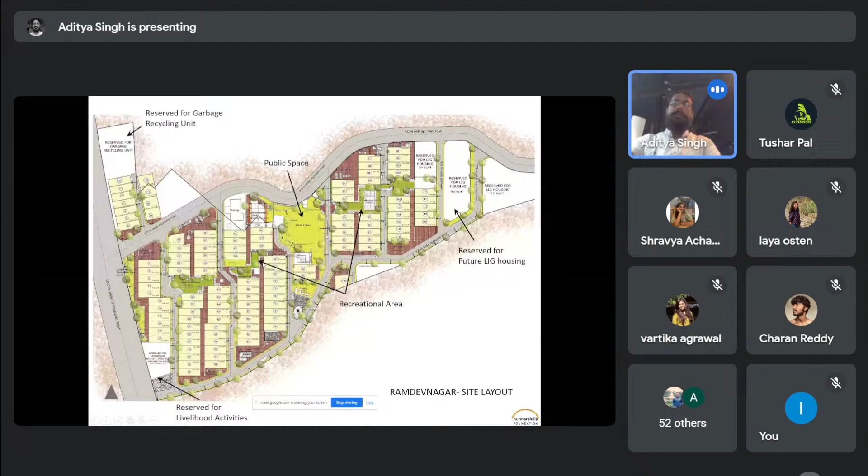So this is basically the strength of a participatory process.

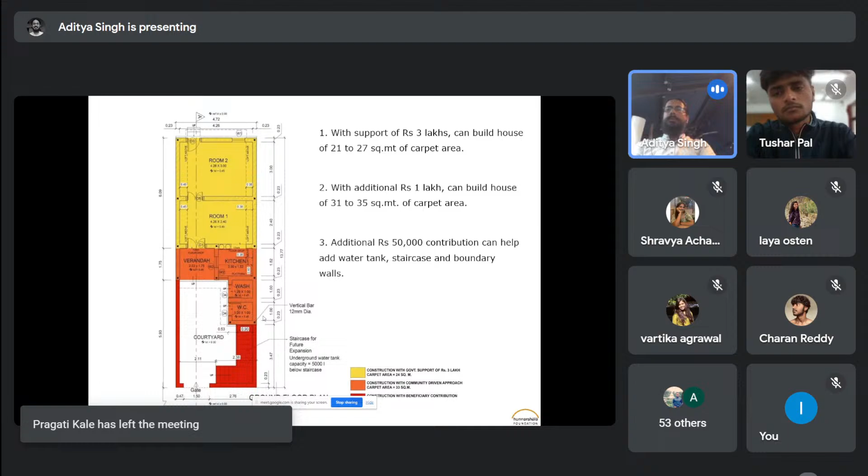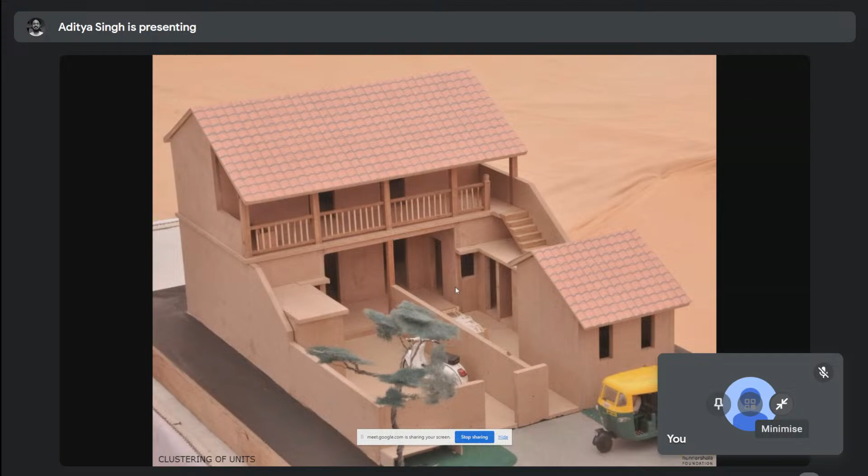They said, why do we build the same model? I need only one room and you need two rooms, so you build one room and I won't. I can invest that money in a staircase instead. So maybe they built a staircase and saved more money. Even the boundary wall at the center can be removed to create a bigger shared courtyard.

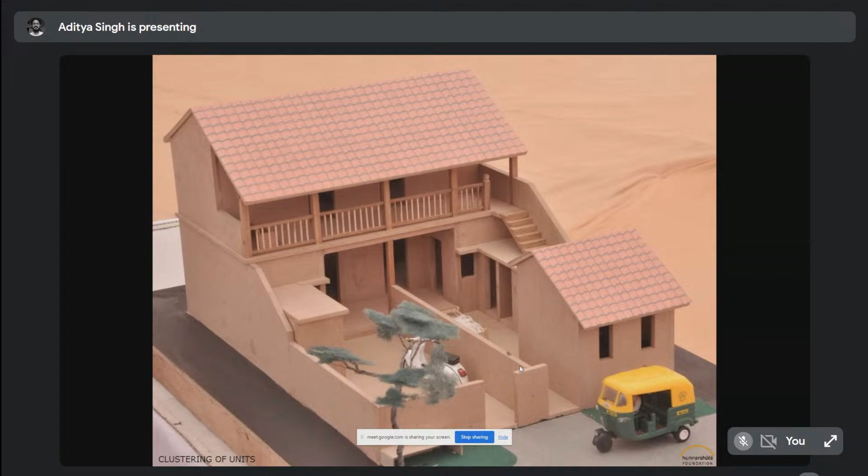These are the options given to people under what we call negotiables and non-negotiables. Non-negotiables were items proposed for structural safety of the house, since it's an earthquake-prone area, so certain design and planning guidelines had to be followed. Negotiables were whether they wanted a boundary wall or not, where windows should go, and what kind of doors they wanted. So these were decisions people made themselves.

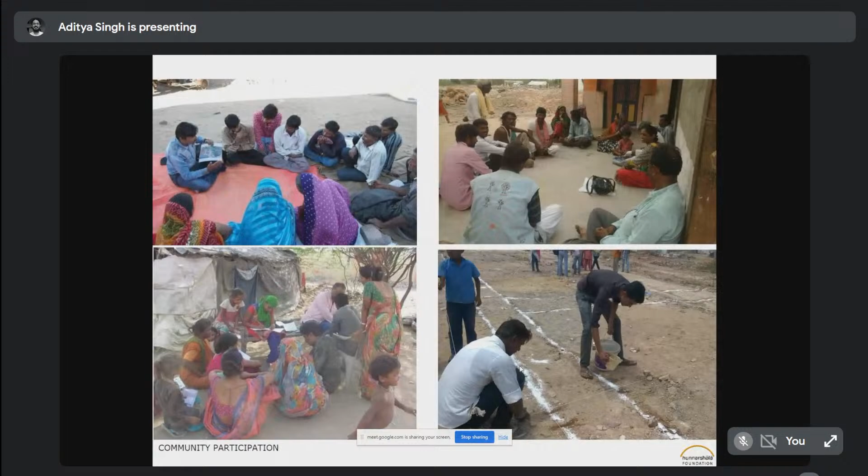Before we even began construction, there was a lot of discussion with people using 3D models, site layouts, and 1:1 layouts, so people understood how big their room would be. We also had many discussions with government agencies, local and state, explaining that you cannot have a rubber-stamp model, you will have to do this, and it is validated because we make sure it is safe and secure.

Then there were facilitation workshops with people, artisans, and masons, who gave us a lot of feedback. In the bottom picture, you'll see one person picking it up and saying, okay, this wall is here, but maybe it would have been better if it was there. That kind of discussion happened, and we got a lot of feedback which we incorporated back into our proposal.

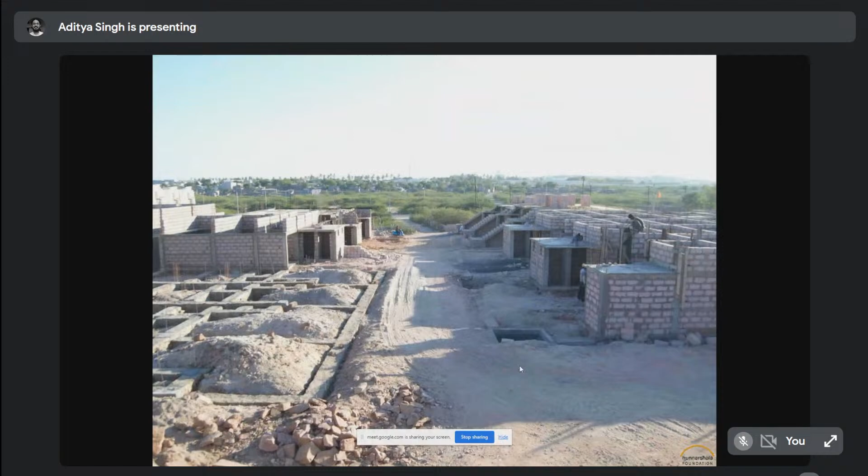After that, this is how construction was happening. You can see the construction pictures of these houses. Some people said they wanted two staircases here. Even though we told them they didn't need two, they could have one, some families insisted they needed two, and they invested their own money to build that.

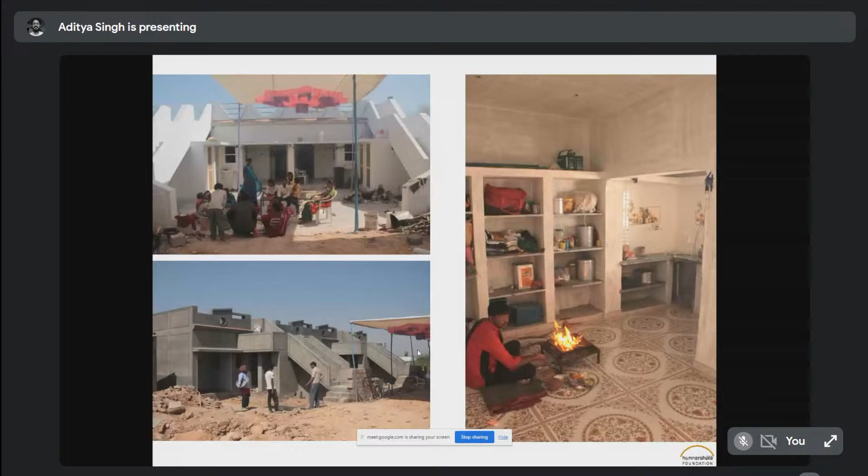These are more pictures of the completed houses. You'll also see the tiles on the floor were not part of the plan the government approved, but people invested in them because they started really exercising their ownership of the house.

So, if there are any questions, I don't know, are there any questions? Okay, I'll just continue.

Hello, hi, I am Ahana from School of Planning and Architecture, Delhi. So I have a question. While this was being made, the construction, where were the people accommodated, like a transit camp, or what was the approach?

That's a very good question. Here, people already had relatives in other settlements. So for 18 months to 2 years, whenever the construction was going on, they moved to their relatives' place. This was something the committee that was constituted decided, how to arrange this.

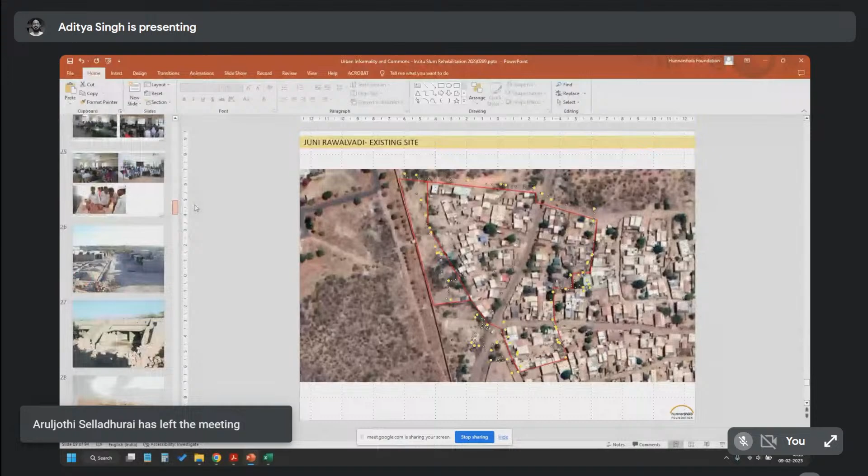As in the previous question, what will be the way forward regarding transitional shelter and all? Sir, can you give us an idea about the Ramdev Nagar project, keeping in mind how it proceeded, how the phasing was done, since we are talking about a lot of people and involving a lot of stakeholders? So how was it phased?

Okay, so the next part that I'll present, you'll get some answer.

But essentially, if there's a good house with good walls, good roof, it's better to retain it and plan around that instead of demolishing it and doing something new.

In Juni Rawalwadi, even though on satellite image it might look like that, many of the houses don't have RCC slab. It would be good if you also look up the DP plan, Bhuj development plan. You'll see there's a major road going in between. So even if these are pakka houses in between, the government is going to demolish them. Okay, so then that's the challenge, that's what you have to work with.

So normally, when we are talking about slum, we are talking about existing basic services for urban poor. We focus on reinventing or rejuvenating those existing basic infrastructure that is already there. But since we are talking about Juni Rawalwadi, we don't have much idea about the entire scenario, how constructing a newer drain is always costlier than renewing an older drain and developing on the existing infrastructure that is already there. So it might affect the costing in future.

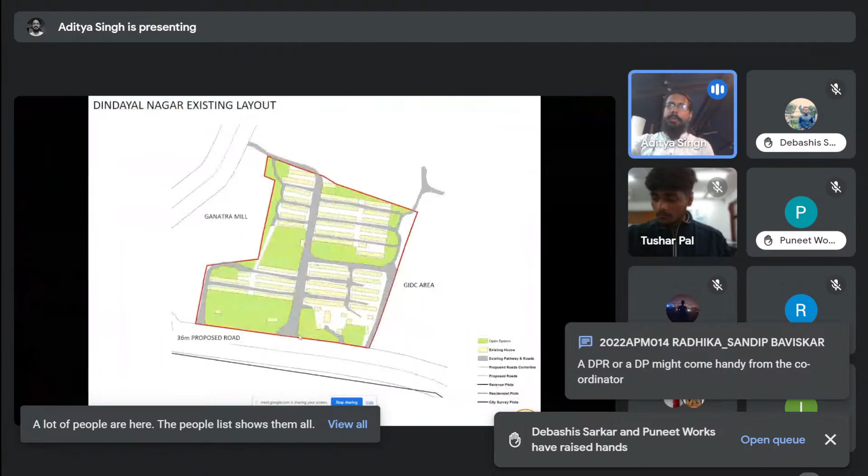So I'll quickly run through the other thing I mentioned initially on how to manage the land. Some of you also asked whether we break everything and build everything from scratch or not. So this is just an example site plan, one of the relocation sites we worked with, and this was the initial plan. This was actually post-earthquake camping that later got converted into an informal settlement.

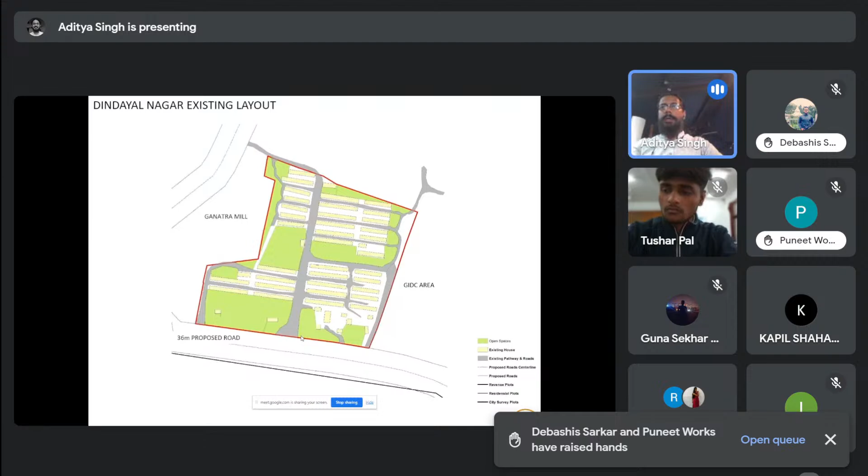Here we used three kinds of housing layouts based on local acceptance of typologies. Type A is where you build G+1, one room on the ground floor and one on top. Type B is where you build two rooms, but the plot is a little wider, with length about 13 meters. In Type C, the length decreases to about 10 meters, the plot is slightly narrower, but shared spaces exist between two houses, which becomes Type C.

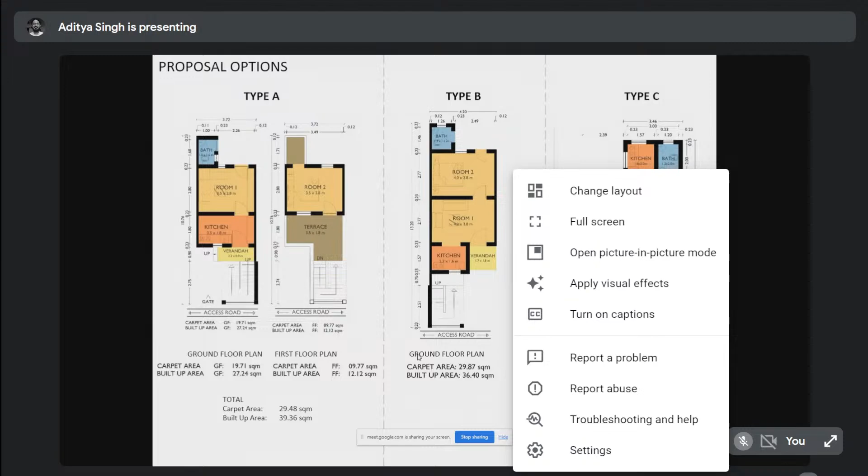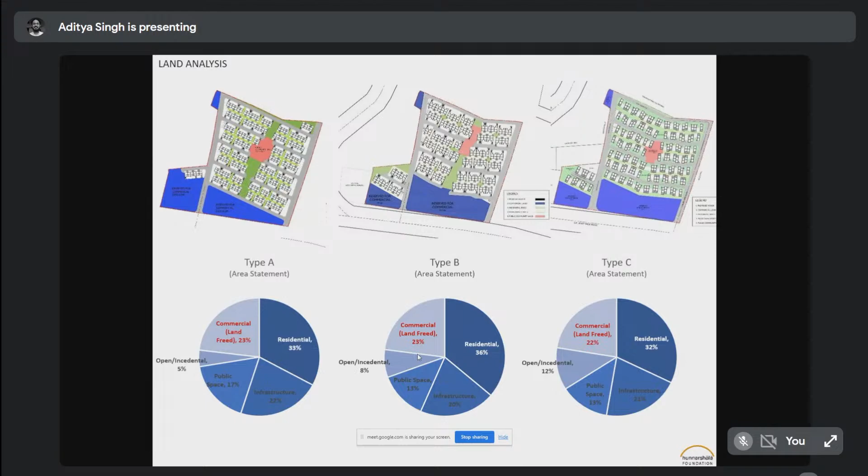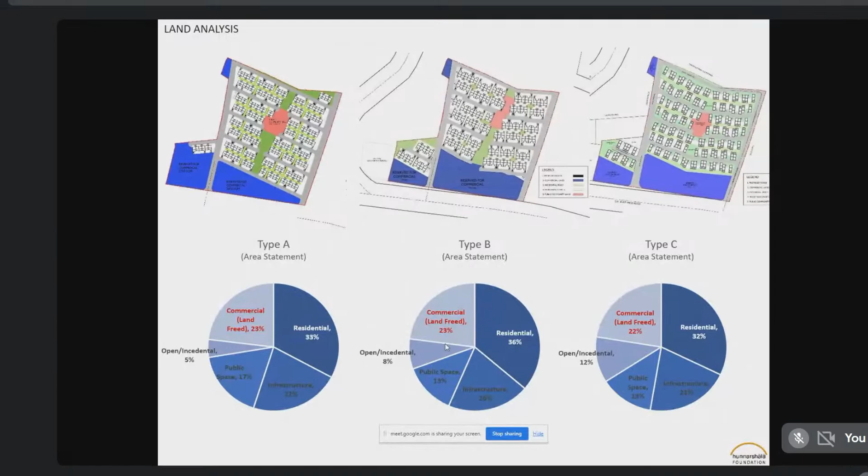So this was basically an area management exercise we did — how do we manage plots or lands? Is a rectangular plot more efficient, or is a squarish plot more efficient in the context of Bhuj? We put all of them in the same site layout and saw how it can be done. We saw that in all these layouts, at least a quarter, 20% to 25% of the land, is being freed, which we can use as a selling point with the government — that you are actually gaining land in your city.

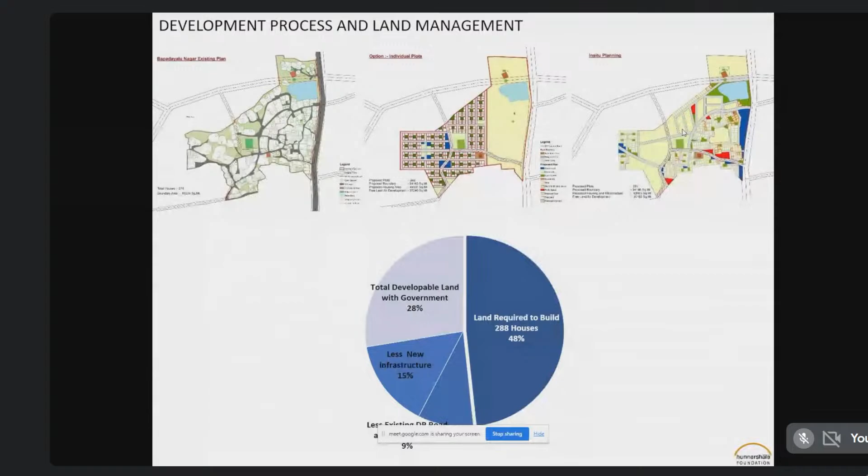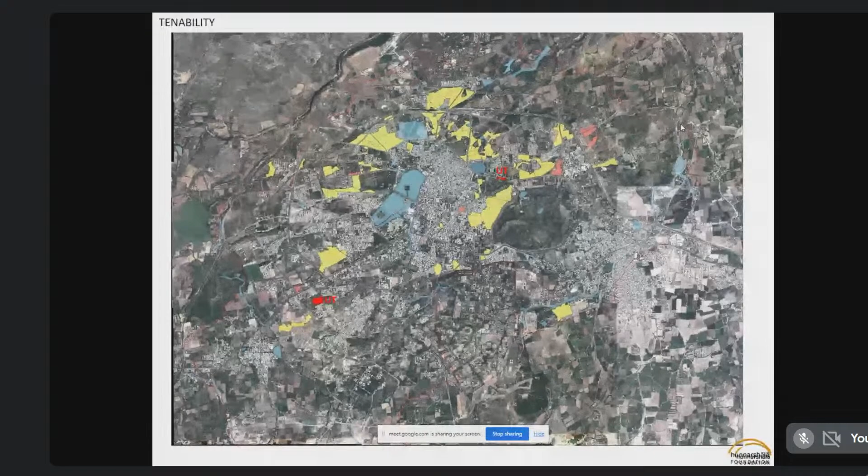So along with in-situ development, you also had to plan with the community for some moving or relocating if they agreed. Some land, in technical terms called 'untenable' — marked in red — is where it's just not legal to build, either because it's forest land or falls in a riverbed that floods all the time. So we also had to think at the city level about relocation plans, which is what we did here.

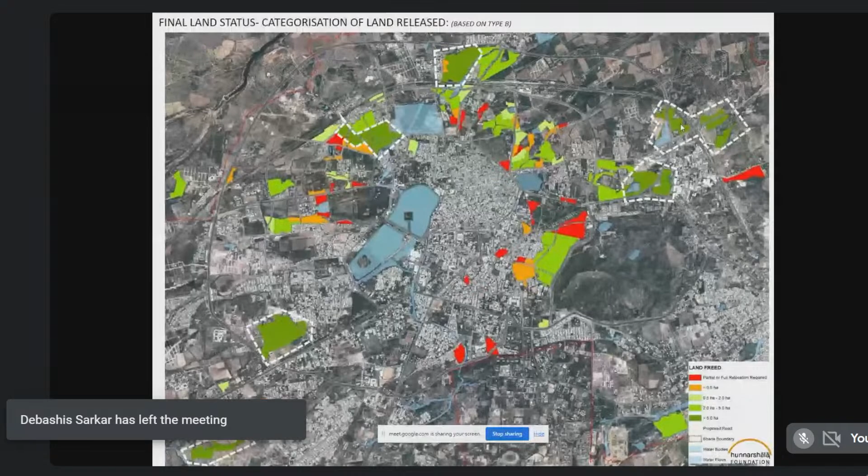For the government, we marked 4 to 5 pockets around the city, showing that if you do this program, you will have land for other public infrastructure for the city. These are basic numbers we showed — about 80 hectares of land is what Bhuj would have gained if it had developed all the informal settlements. And then for PMAY, I just want us to have a look at this guideline also.

Because this Juni Rawalwadi project you have to work on falls under the PMAY program if you want to do it, and there are 4 verticals. So just have a study of that.

I won't go into detail on this, except for the second one, which is credit linked subsidy. All three verticals are applicable for Juni Rawalwadi, but there are different ways to do it. This is where you'll have to study and see what are the creative ways of accessing the scheme from government.

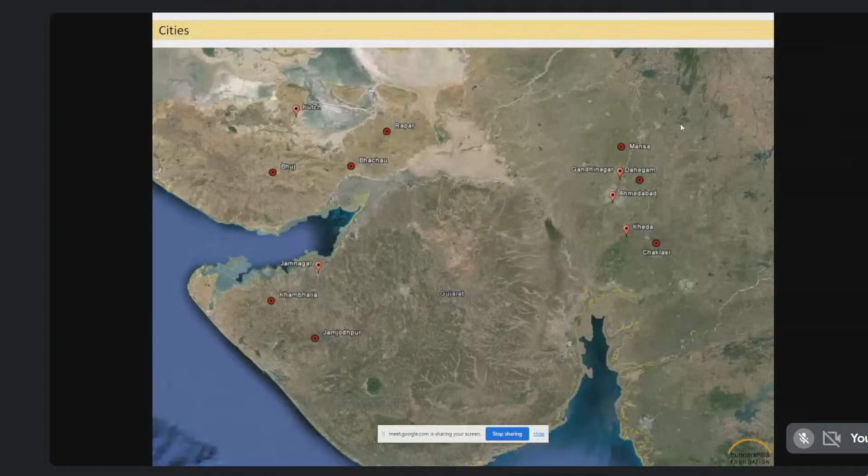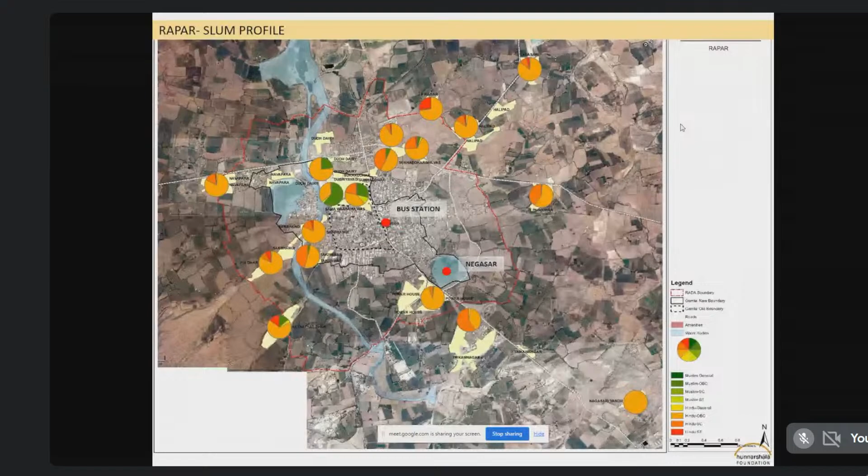We went ahead not just in Bhuj, but across Gujarat. We did planning exercises in 8 cities to see what is feasible and how to prepare plans for them. We went to people, did a lot of surveys on what kind of houses they want, their income levels, the informal settlement itself, how much services they already have. Then we presented it back to the local body, creating maps where all the pockets had certain criteria of what community these are - slum profiles that we did.

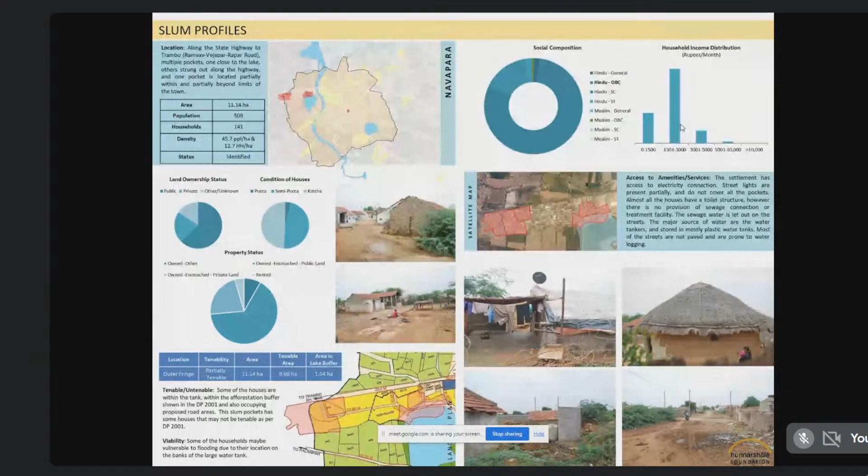For example, this is a slum pocket which is probably just partially tenable because half of it is on the lake. So how do you decide what is to be done? Like for Juni Rawalwadi also, you have this road coming in, so it is partially tenable. So how do you work with that?

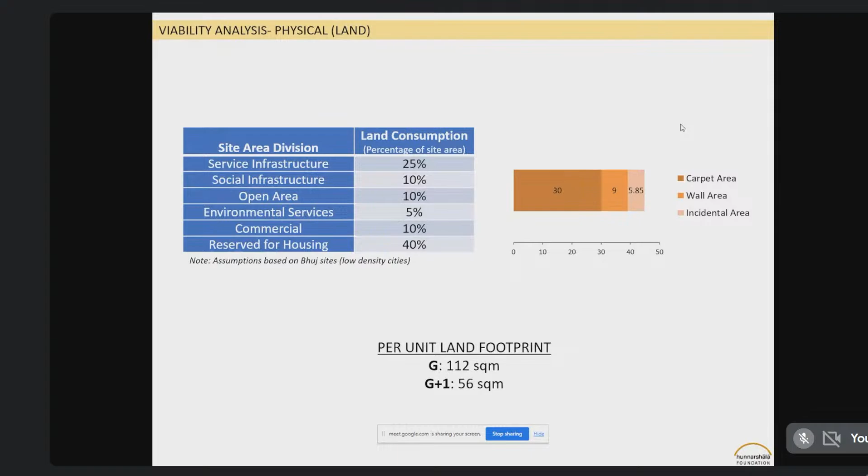Then a list of all the slums, what is the density we are looking at, and what is the land footprint suitable for a city like Bhuj or Rapar or different cities we worked in. What is the land status? Land ownership becomes very important - is it government owned land, private land, forest land, or central government owned land? That becomes very important.

We also created something called a relocation or proximity map, where in the worst case scenario we have to relocate a community because, say, they are at the riverbed and don't have anywhere else to go, and they themselves want to move because it gets flooded every rain. So what is the walkable distance so that it does not affect their livelihood options, their transport options? We took 800 meters based on discussions and then decided who can move where.

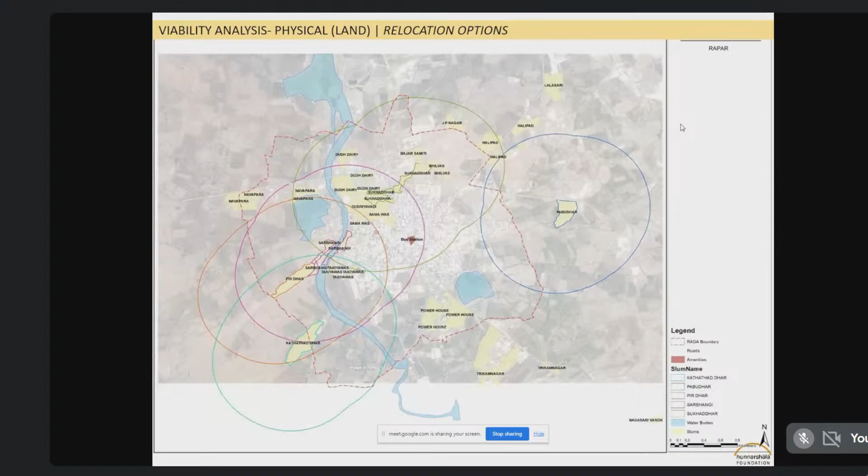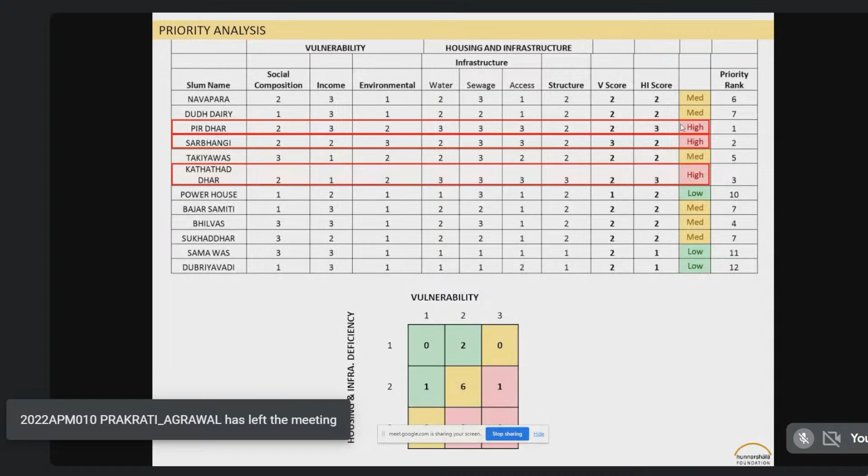And again, after relocation, what is the city level data that comes in, and which are the slums? So we also created something called priority analysis, which identifies the slum pockets that should be worked on first.

I'll skip this - these are just the numbers. We created a strategy for the government of working at the city level.

As students of planning, we realize that you have to look at the larger context and propose things which create systems so you can work at the ground level. So you have to learn from the bottom up, but create a policy that works top down.

And then the larger question - it is not just housing. Government schemes tend to look at housing as something very individual, very infrastructural. You provide a house, you provide infrastructure, it's done. But that's not housing. And that raises this question: who does the city belong to?

Does it belong to shop owners? Does it belong to people walking on the street? Does it belong to a street vendor? Does it belong to cars or bikes? Does it belong to Nagarpalika employees sweeping the street? Does it belong to people selling vegetables? Or does the city belong to these people staying in plastic sheet tents for years, not getting any space? And why are they staying there in the first place? Why did Juni Rawalwadi come to be an informal settlement in the first place?

Or like street vending - like I said, we have to look at housing not just as housing, but also, as one of you asked, at livelihood. Many of these slum pockets in Bhuj have street vendors as the main earning member in families. So can we do something for that and make that part of the urban exercise or housing exercise?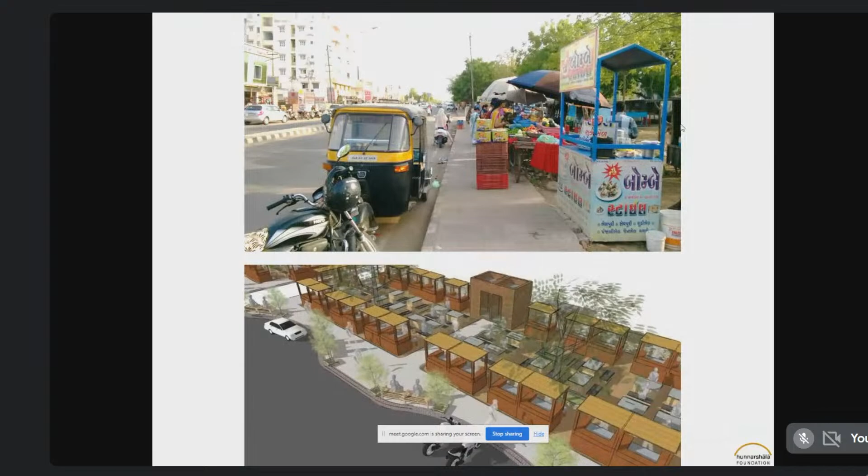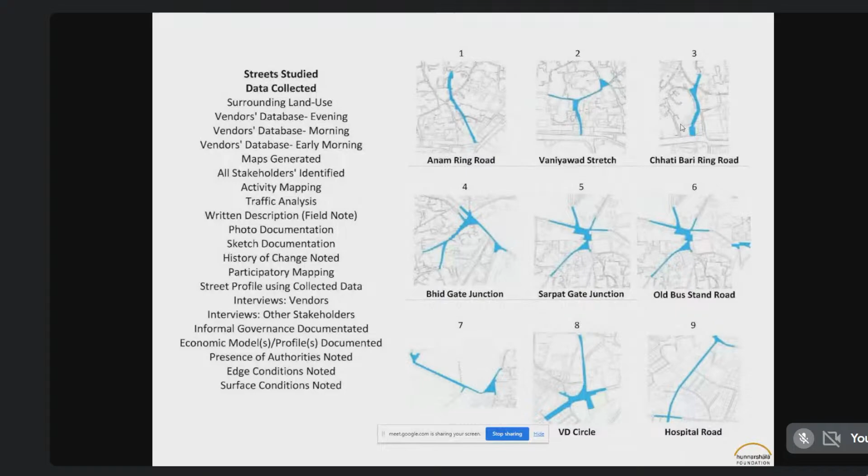So we worked with street vendors. We have built street vending zones with the government. We have mapped different streets - how many vendors are there, which informal pockets are they coming from - and this is just an example. So it is all about working with the commons instead of working with individual households.

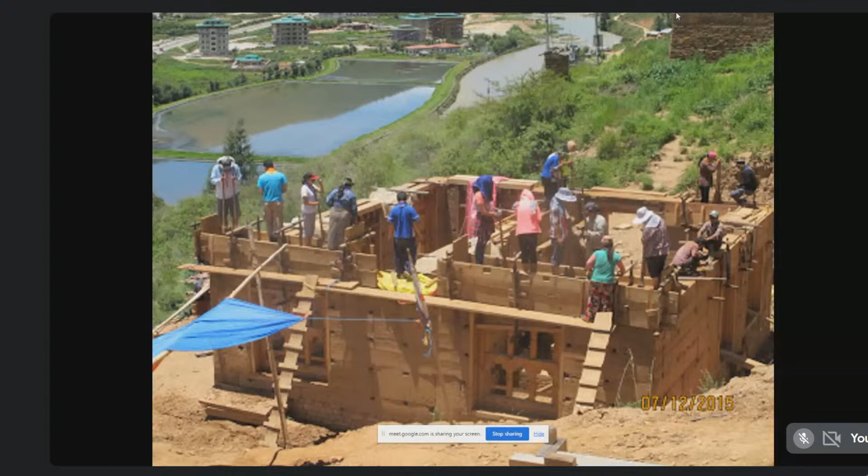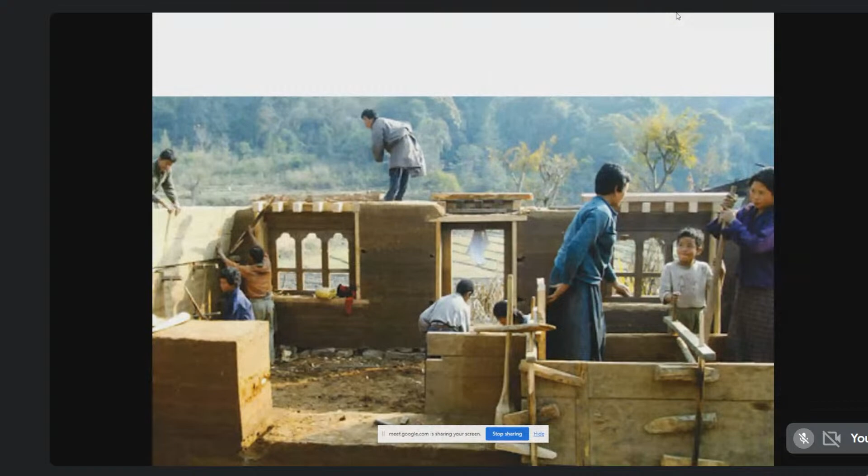You have to look at the collective, and this is how humankind has been building. This is a photo from Bhutan, where people from different communities come together and build a school for everyone. Children are participating, women are participating, and half of the time there's no financial transaction at all. So can we use this social capital while proposing something for our slums?

They will have songs for different stages of construction—foundation will have a song, lintel will have a song, roof will have a song. So instead of coming from outside as an outsider, with our high-handedness, thinking we are planners or architects who know everything, and destroying the social capital, how do we instead rely on that? A lot of these houses and settlements never had planners or engineers or architects. They were just people who lived in these places. So how do we learn from this, even in the urban context?

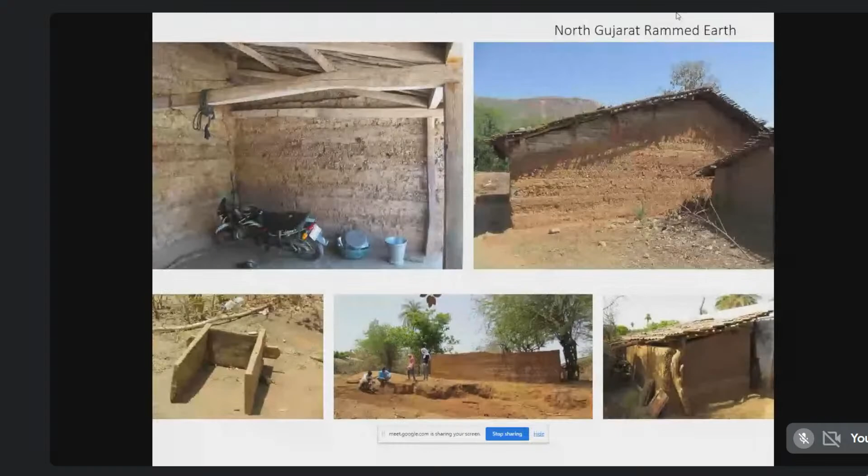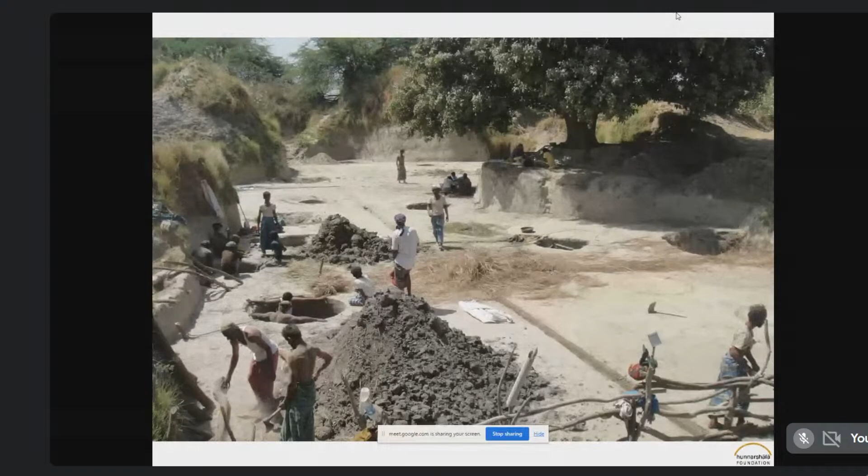This is North Gujarat, similar kind of construction, and not just houses—this is digging of a well. Aabhat is basically this: in North Kutch, the activity of coming together and helping a family build a well or a house is called Aabhat. People come together, no one is paid as such, there's no financial transaction, but there's a feeling of helping each other, a feeling of camaraderie between each other, and that is how they do this work.

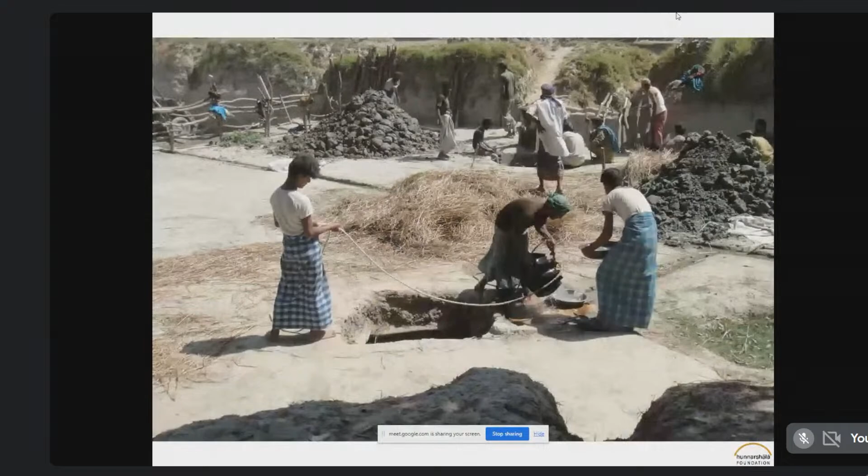Then the village has a new source of water, and even animals respect that. This is all made of mud, and still animals are very careful not to destroy it. In the end, there's a celebration—everyone comes together and eats. This is something that, except for the current capital-oriented Western civilization, most other civilizations are still driven by the idea of commons, the idea of togetherness.

As planners, how do we rely on that? How do we make things human for people? How do we work as a collective instead of individuals? I think this is where I'll end my presentation. These are the four points I'll give you as a takeaway, and you have to think about how to really use them in your work.

First is collective: instead of looking at housing as a structure, how do you look at it as an act of housing—something done over a period of time, and as a collective, not individuals coming and building their own house and forgetting who lives next to you.

And how do you rely on these commons? All of these communities, especially in informal settlements in cities, have some social capital with them. So just look up what social capital means. What is your social capital where you are in your community? And how do you reflect that in the policy or planning that you're doing?